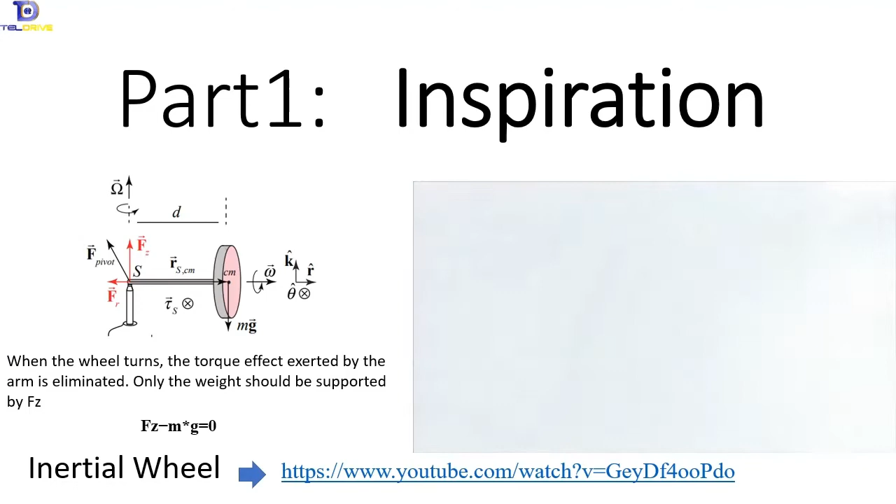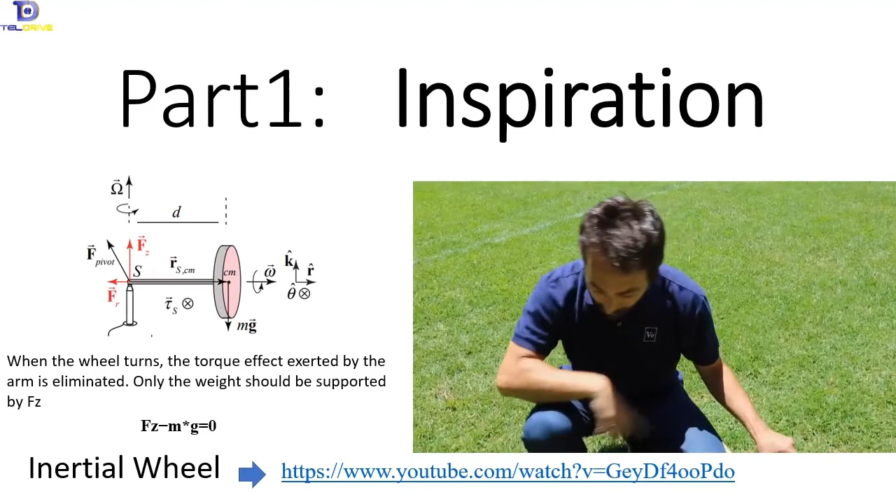I am here at the University of Sydney where the mechanical engineering shop has built this incredible piece of apparatus for me. It is a 40-pound, that is 19-kilogram, flywheel on the end of a meter-long shaft. Can you imagine trying to hold this out horizontally with just one hand at this end? It is impossible, okay? Now I'm gonna let go.

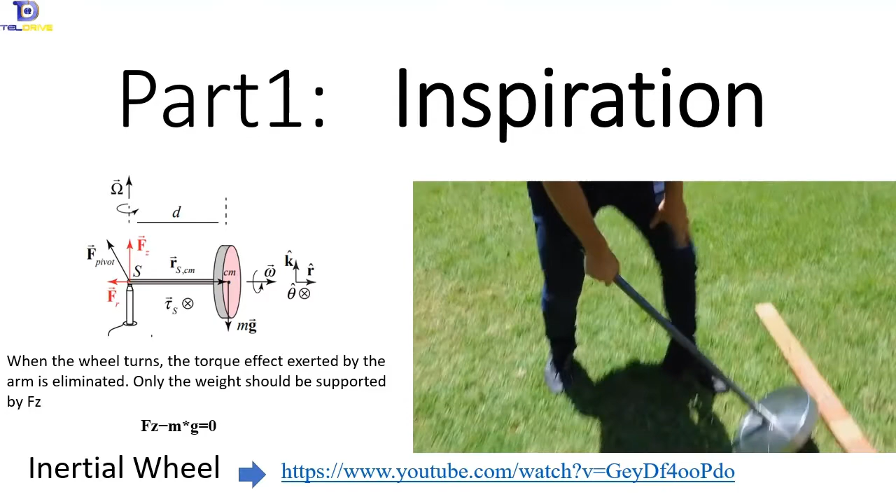You gonna be able to hold this at all? I hope so. Can you lift it out? Make it horizontal, hold it. Come on, just try to, I want you to hold it out horizontal. See if you can. Hold it.

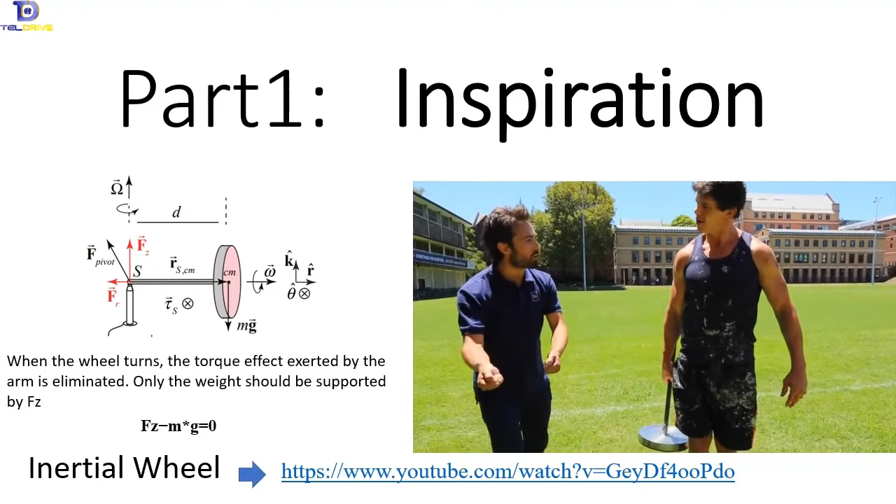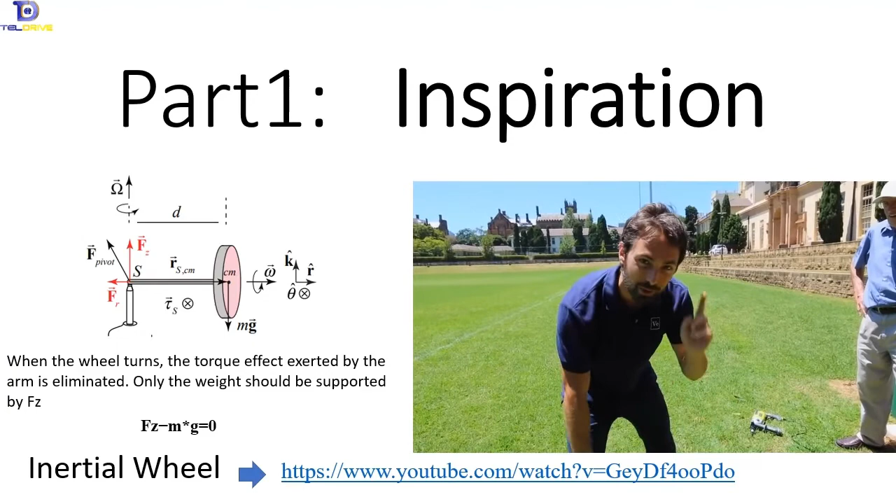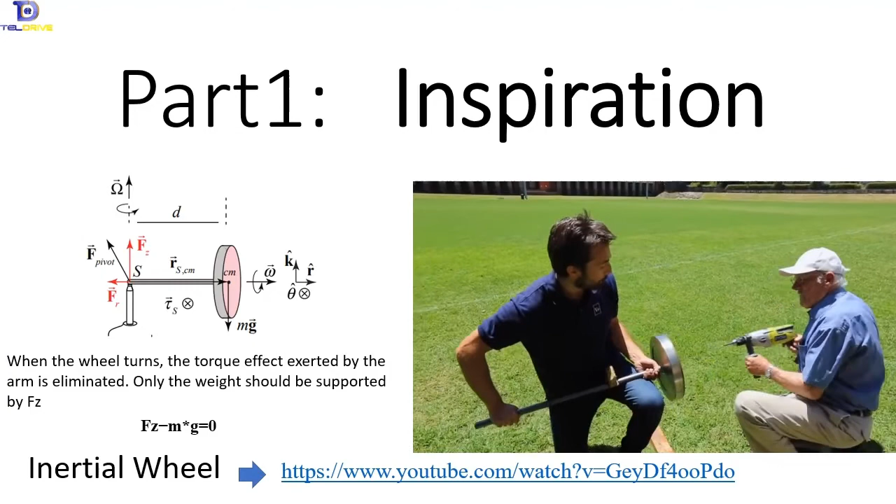Oh, come on. What I'm gonna do is I'm going to spin this up to a few thousand RPM, and then I'm going to attempt just that, to hold it from one end and have it out horizontally. Five, four, three, two, one, boom. I'm going to let go with my left hand.

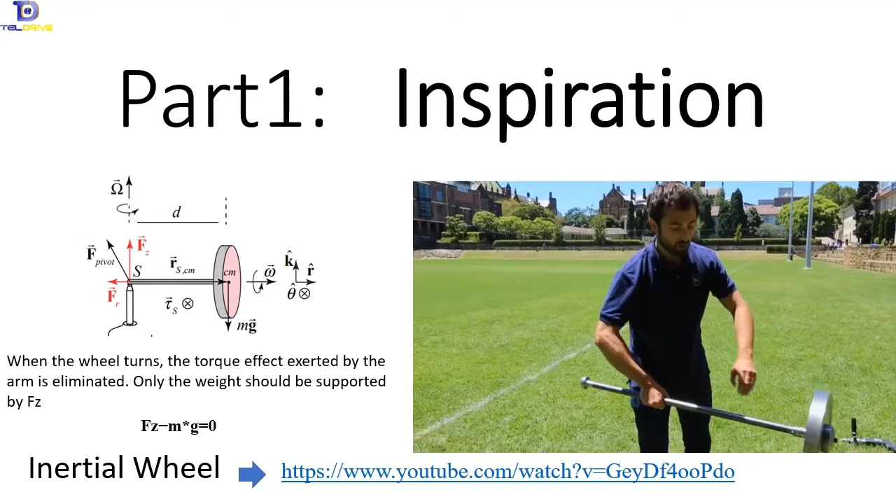What you'll see is that the shaft remains horizontal. You can see it going around there. It almost looks as though the wheel is weightless. How does this work? Well, instead of pulling the wheel down to the ground as you'd expect, the weight of the wheel creates a torque which pushes it around in a circle. You may recognize this as gyroscopic precession.

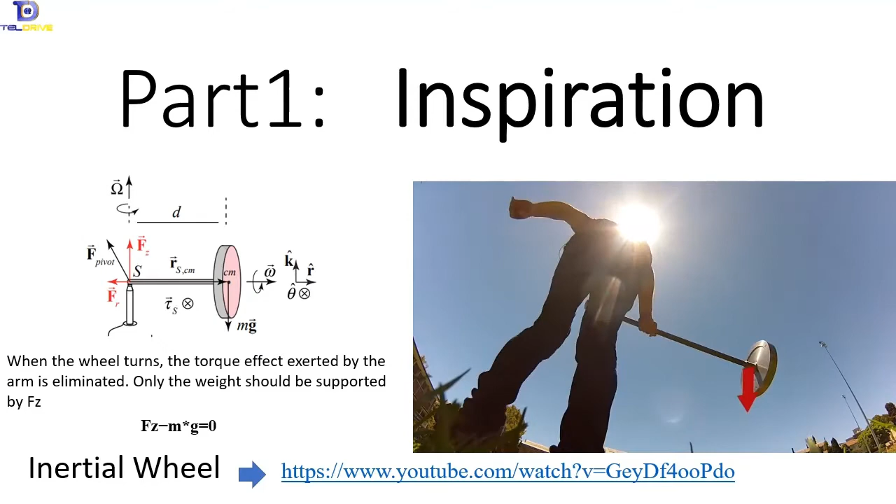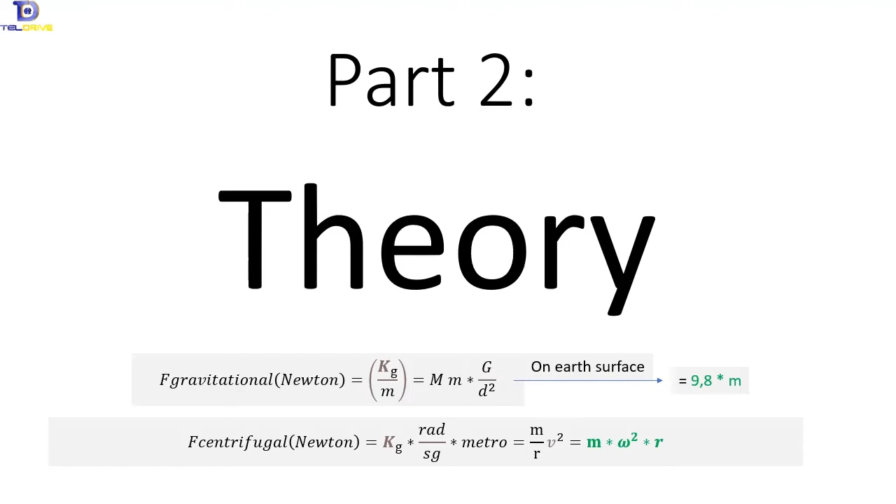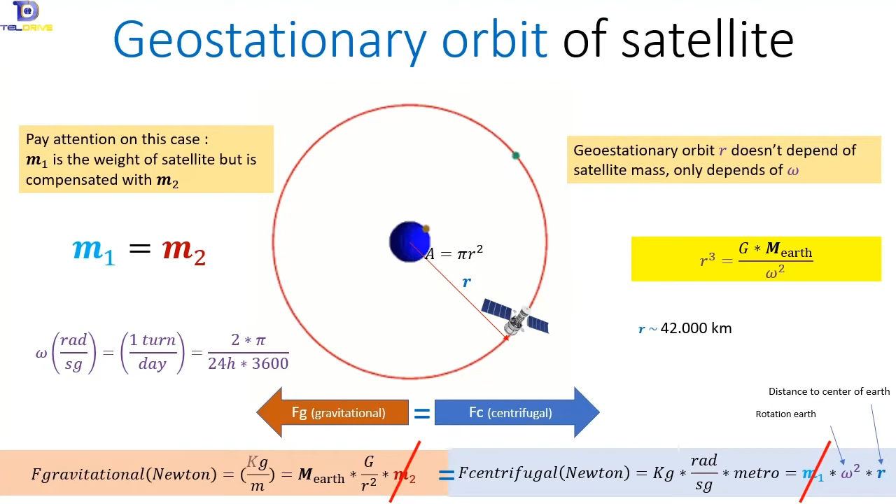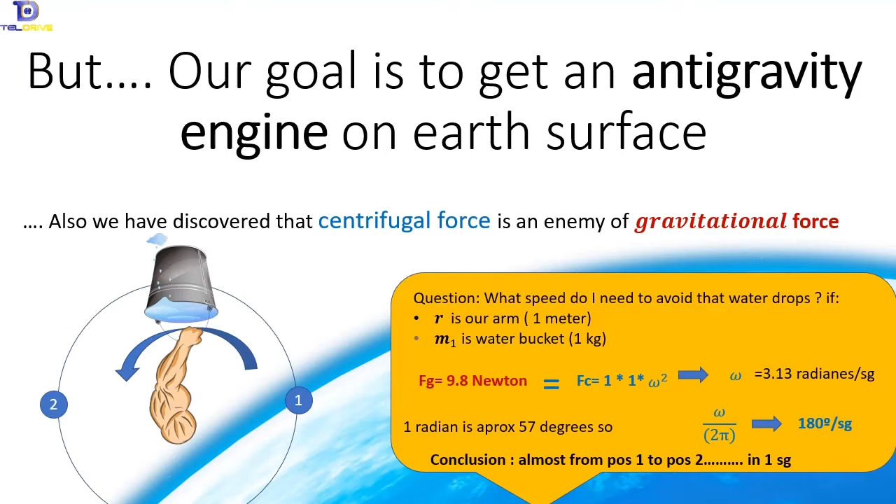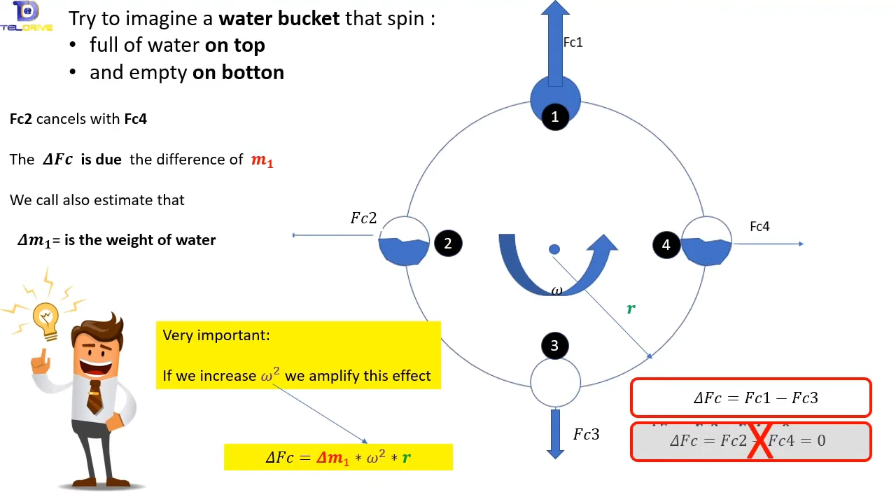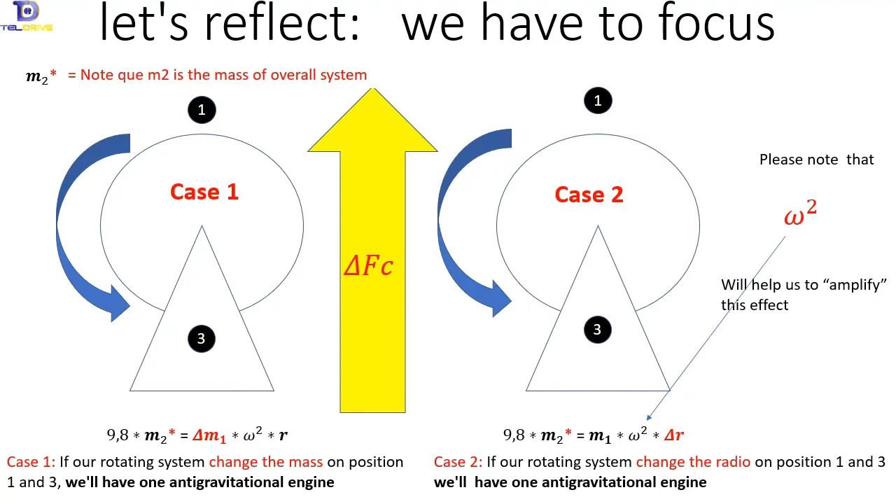So let's do it. Let's implement it. What do you think? Is it impossible? Let me show you that it's not.

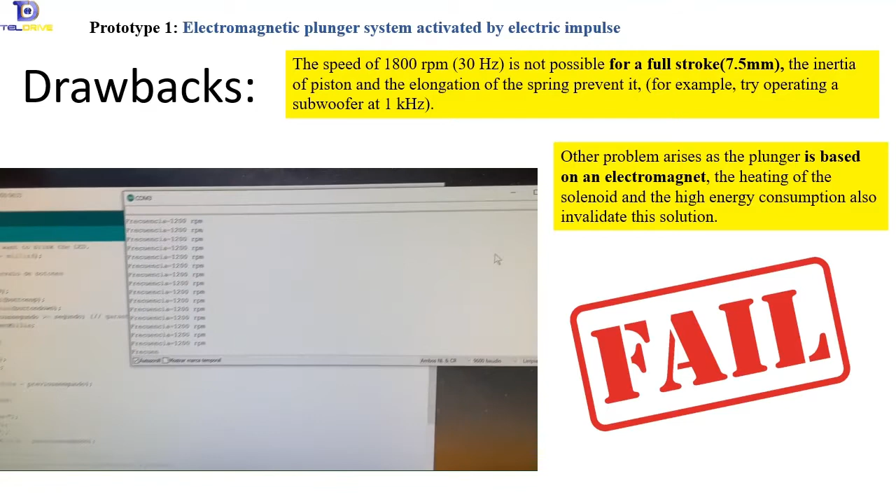In the previous example, the failure was the inertia of the mass. The best way to avoid this is with the rotation of another system. Imagine that we can place some motors that we will call inertial motors, and they will rotate a mass as M1 with one arm. The first thing that will come to mind is that this will produce some eccentricities in the spinning. Don't forget that we can put different motors in a symmetrical way and spin in reverse direction to compensate these eccentricities.

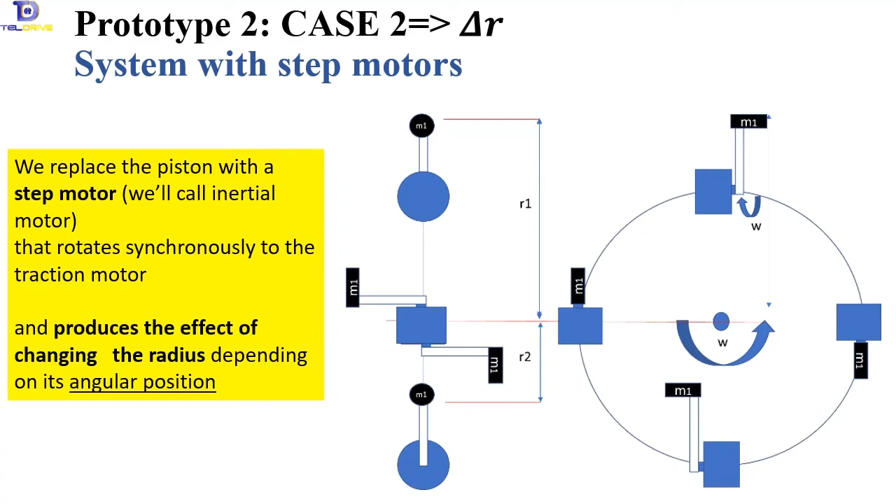So have in mind that the inertial motors and the traction motors will be synchronized, and we will choose direct or reverse direction to compensate eccentricities. It's important to note that we discarded the option that the inertial motors rotate in the same plane as the traction motors. Don't forget that to avoid eccentricities, we will have to reverse the direction of rotation of some motors. Due to this, if we place them in the same plane, this will produce a compensation of centrifugal force that will generate a lot of performance issues in our system.

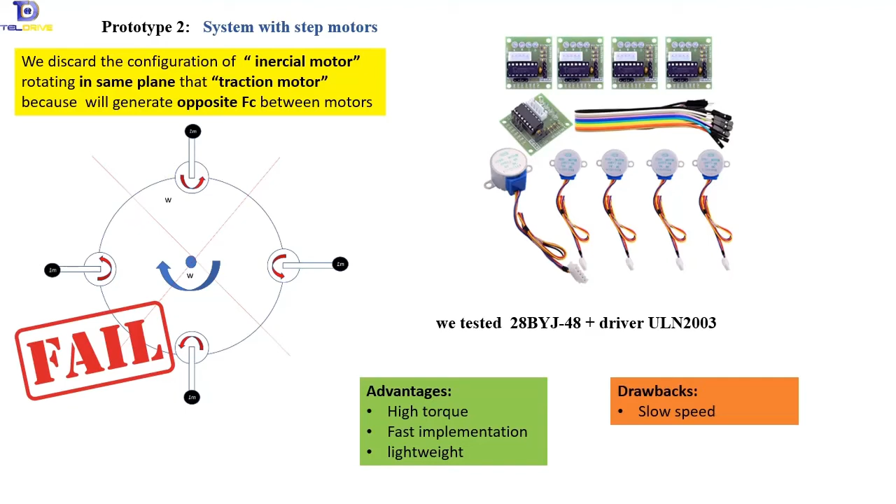To implement this prototype, we have chosen very economical step motors. The reason is because we still didn't know if our invention will be viable, so it's better to risk little. This motor has demonstrated to have a serious drawback. Although it has a very high torque because it has a lot of gears that reduce speed, the low speed is the main issue. But anyway, we have kept going with this prototype because we have discovered a lot of new problems in this development.

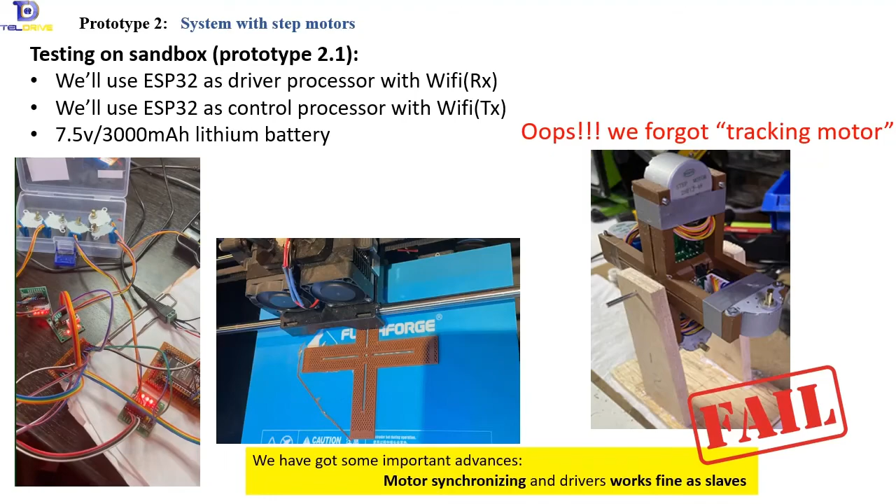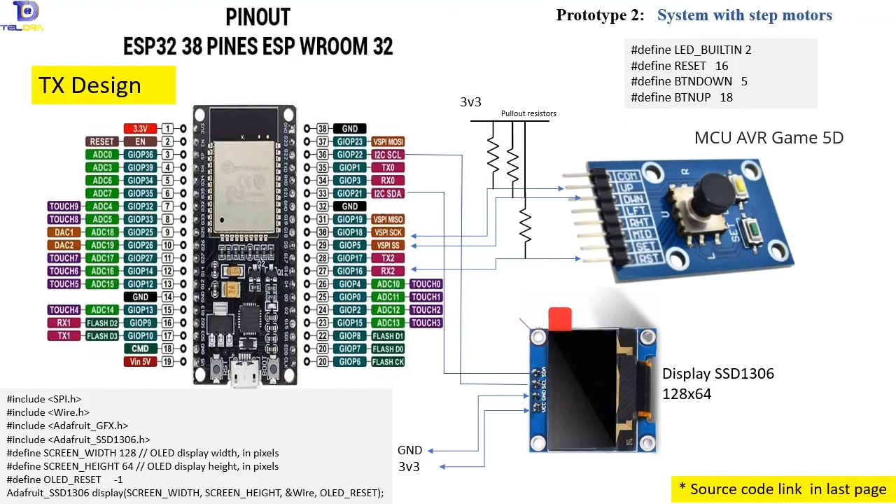This prototype has allowed us to advance in the electronic design of the transmitter that, as you can see, uses an ESP32 and some external components like a 5-position microswitch and a small display that indicates the speed that we are commanding to the receptor. Also, it's important to consider that in the receptor we will have signaling for the inertial motor and for the traction motor. But oops, they must be synchronized. Why don't we use the same signaling for all the 6 motors? Well, in practice, we have some issues connecting the drivers in parallel, and we have to use 2 different sources of signaling to avoid signal attenuation.

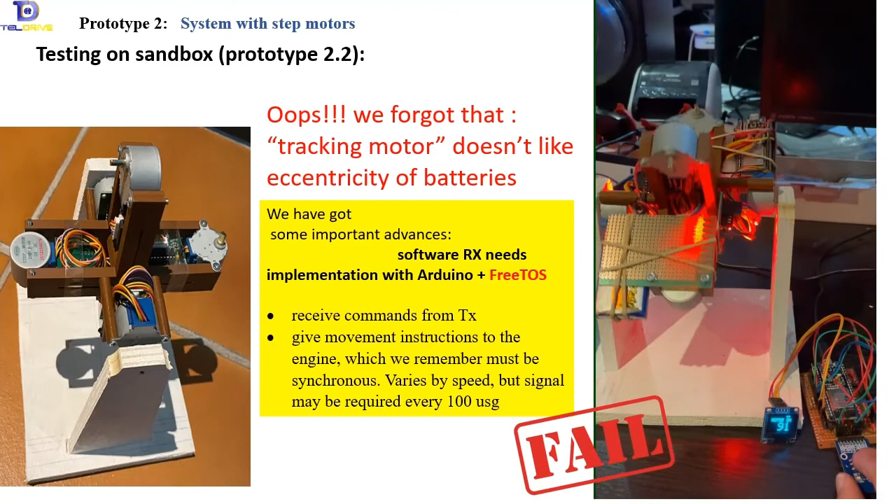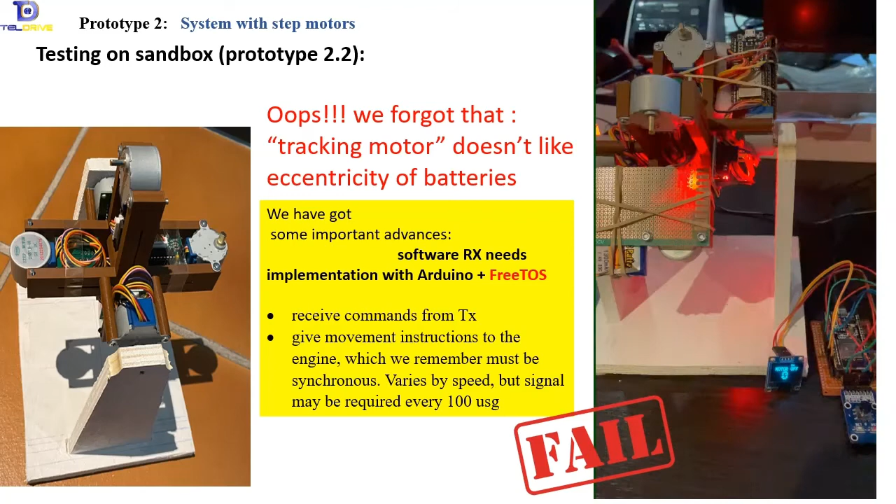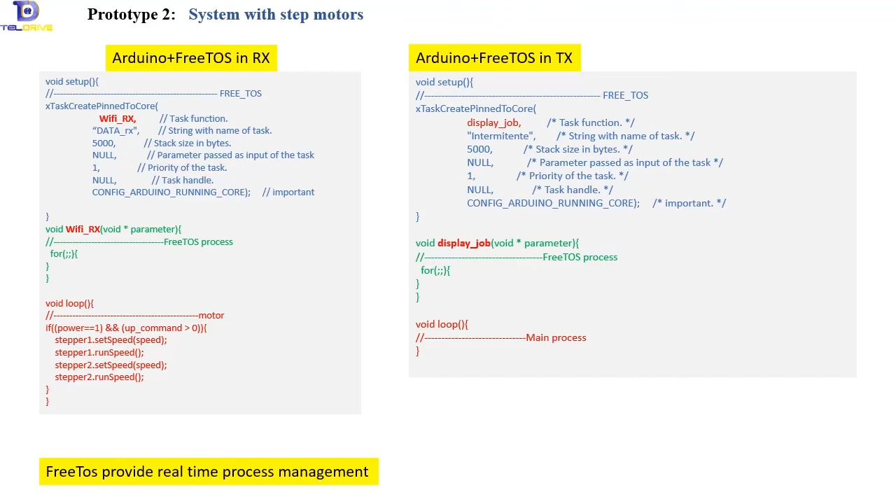The first rotation test you have seen showed us a serious design error. We must avoid eccentricities in the rotation of the system, especially with batteries. Also, it's important to consider that when we send commands to the receptor, the ESP32 is interrupted and stops the motor. That has been avoided with a functionality included in the Arduino IDE. It is the FreeRTOS library that allows 2 processes running simultaneously in real time.

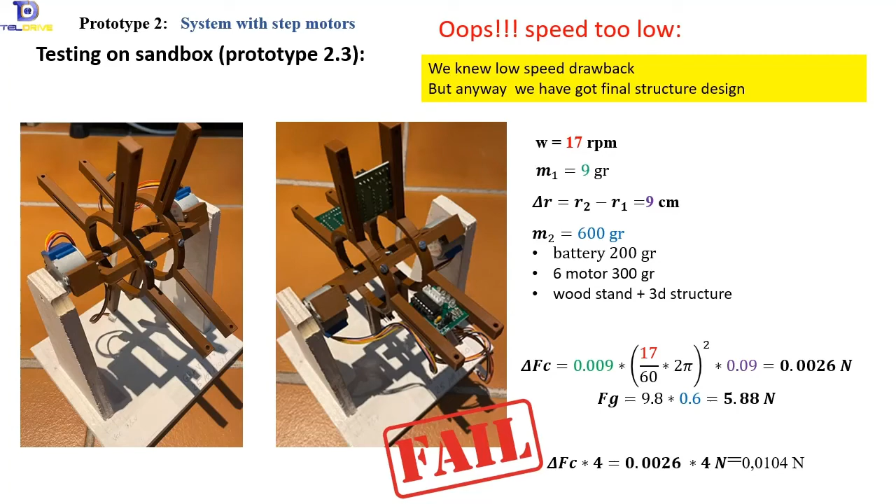You can see our final structure design. This brings us closer to something that is seen with real possibilities. The system doesn't present eccentricities and solves all the previous problems. So it's time to put it to work. Let's first make a small calculation of what will be achieved at 17 RPM. Oops, better don't try. It's a waste of time. Even if we multiply by 4 motors, the centrifugal force will be very low. So let's go to our prototype 3.

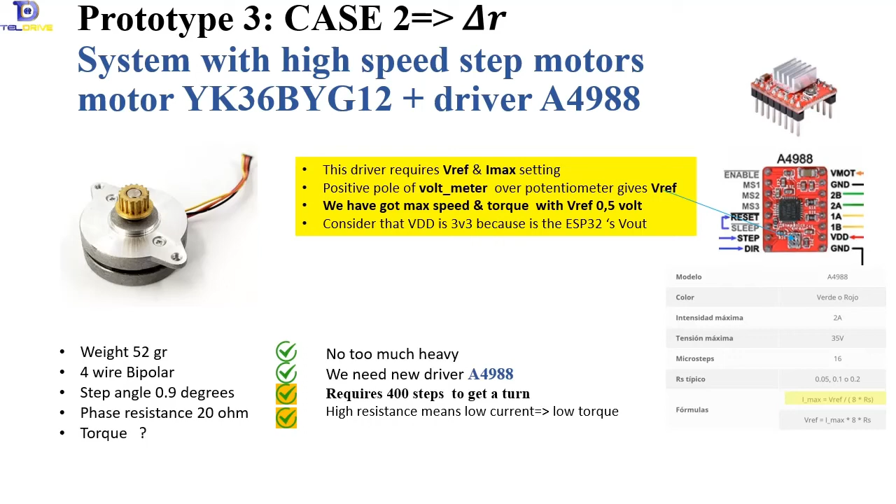We need a light motor with high torque and the highest speed possible. But it's a difficult task with step motors, since force and precision are normally required regardless of weight. We found one which changes the type of winding, is bipolar, and needs, of course, a new driver. But please don't forget that 6 motors will be needed, and the drivers also have to be mounted in parallel to be a synchronized system.

Something has to be changed also in our electronic design because the new driver, the A4988, needs to be regulated to the maximum current beforehand, because the internal resistance of step motors is very low, and in order to protect it, that overcurrent has to be limited. One of the main advantages of this driver is that it supports a digital level of 3 volts. That is what the ESP32 gives us. But we are on the right way. We have faster step motors and very good drivers.

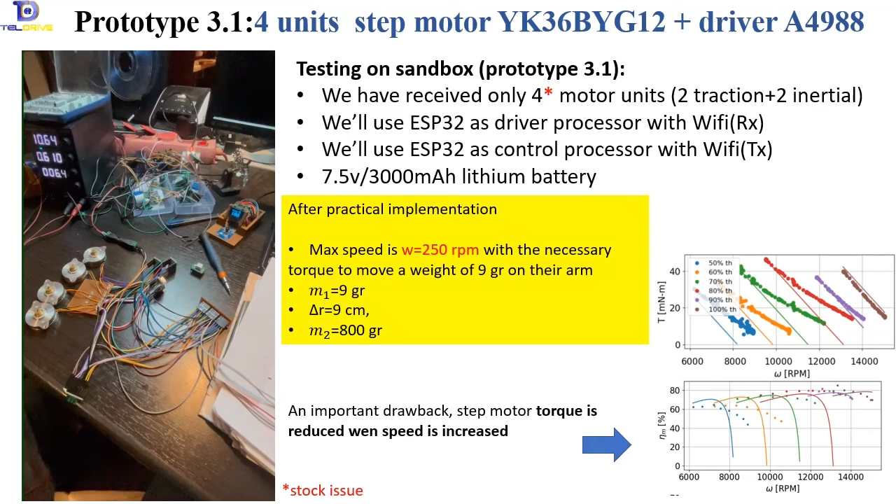Testing everything in the sandbox, it seems that everything works fine. Only 4 engines have been achieved, but the important thing is to keep moving forward. We quickly realized that moving a 9-gram load at a speed above 250 RPM generates torque issues for these engines. As the speed increases, the torque decreases significantly. Bear in mind that we are in case 2.

What we are looking for is the variation of the radius of a mass in the turning system. At a higher speed of the traction system, we also have to move the traction motor at this speed. We get some balance at this speed of 250 RPM. But we quickly come to the conclusion that even though we have gotten closer, it is not enough.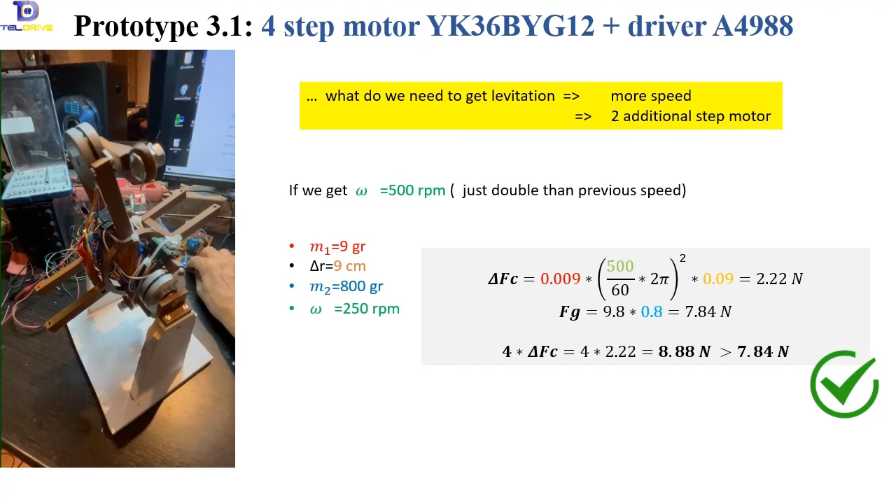What is next? I need you for this idea. Go ahead. The theory is good, but the technological solution is not easy. Together, we will surely improve it. There are many ideas to try. The problem, for example, with brushless motors is that they are more difficult to synchronize. But you can try. Any other ideas?